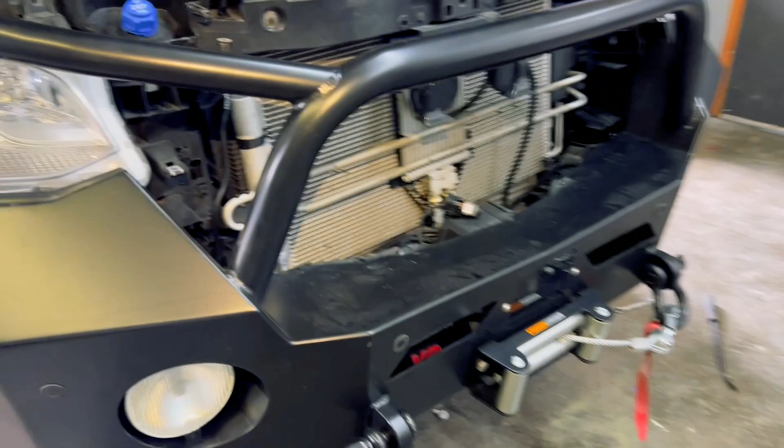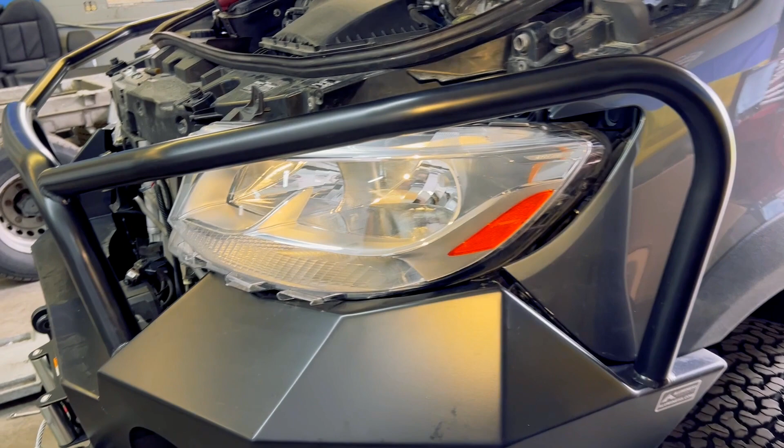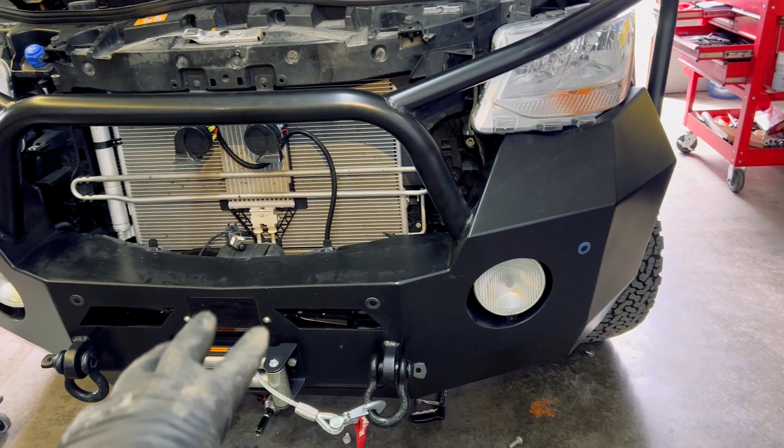After a few unsuccessful attempts to take the headlight out, unfortunately there's no other way. I'm already loosening the bolts that hold the bumper, but there's no way to take the headlight out unless we completely take off the bumper. I mean, I'm not gonna take it off completely. I'll use the forklift and loosen the bolts more, lifting it a little to have access to take the headlight out. Because of those rails, the headlight just gets stuck here and doesn't want to move at all.

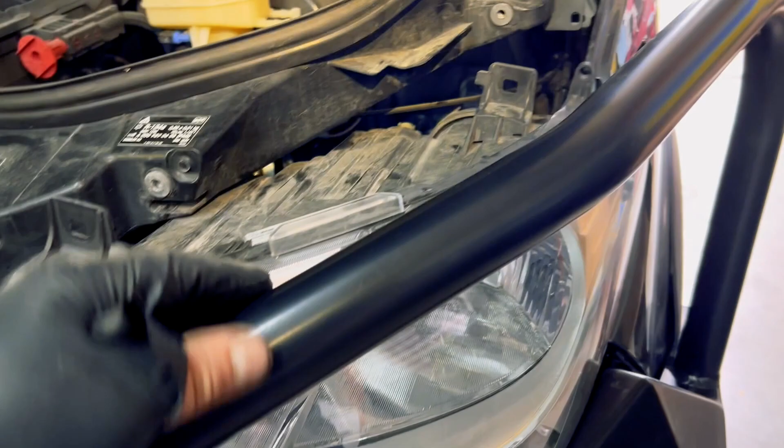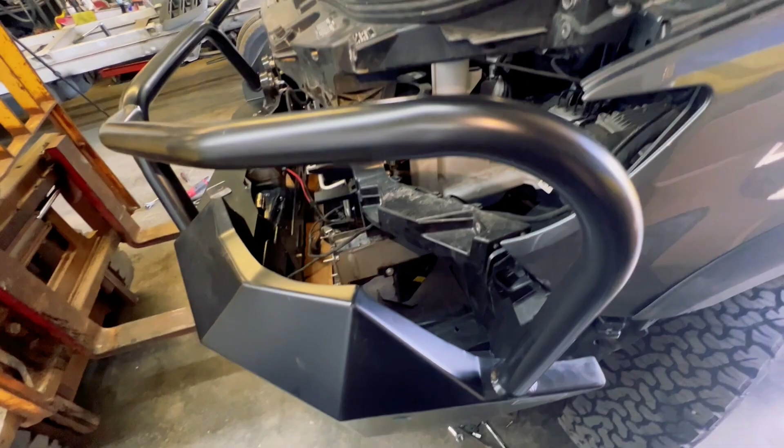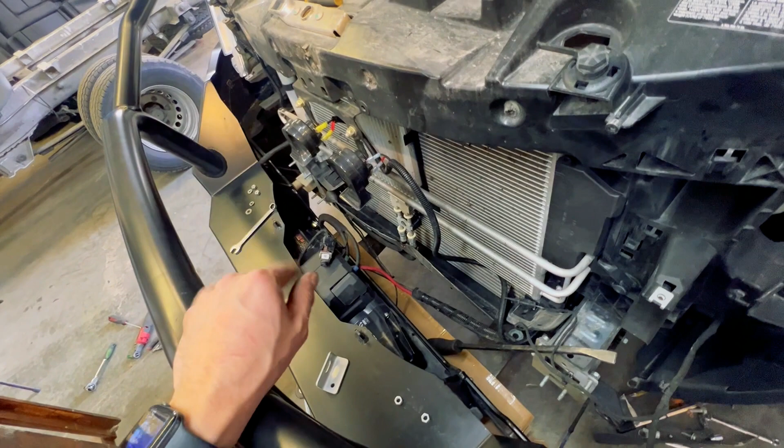So the left side is completely out now, but I had to almost remove the bumper. I just can't imagine if the owner of this vehicle, or any other owner, needed some maintenance on the radiator with a bumper like that. It's gonna take some time to get this bumper out, and I just don't want to disconnect any of the sensors, parking sensors, or cameras. So that's why I'm trying to be as accurate as possible. But it definitely takes some time to take it out.

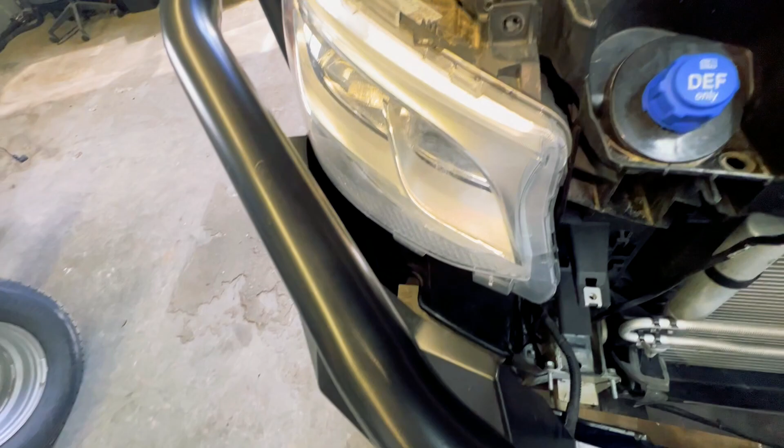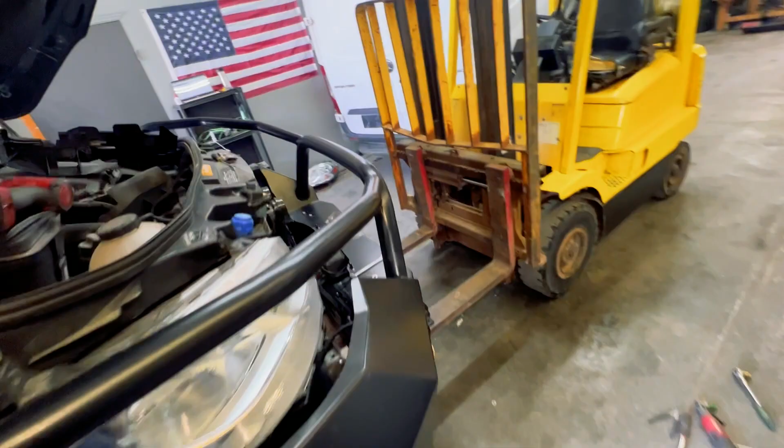On the left side it was easier. The right side will be more complicated because it goes behind the DEF tank. So we'll put the left side in first, and then move the bumper to the left so I can free the right side. That's how it's gonna be.

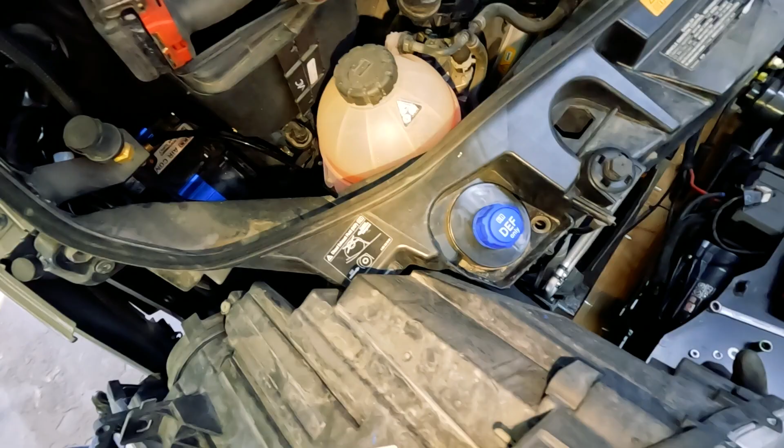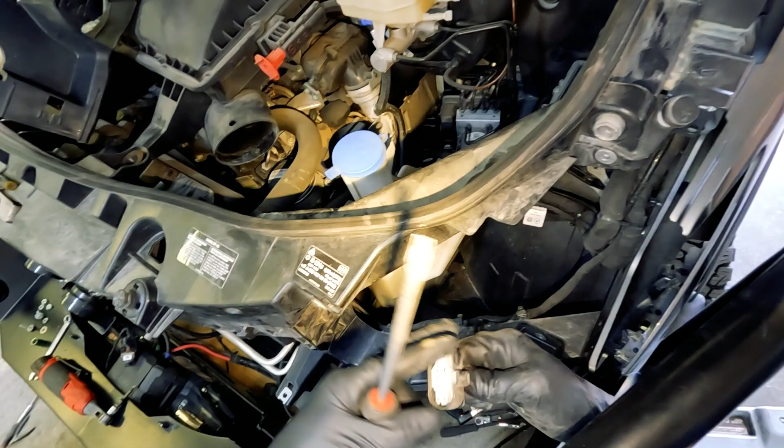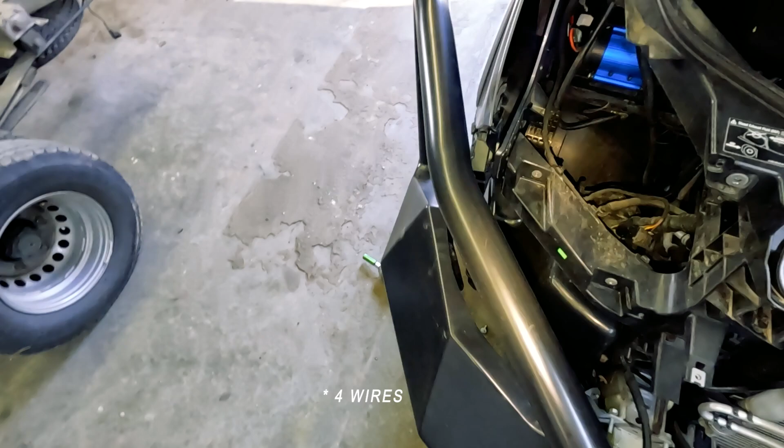Okay, so what we're gonna do now? Now we are going to change the order of the pins of the connectors on both sides, and add 4 wires for the leveling system.

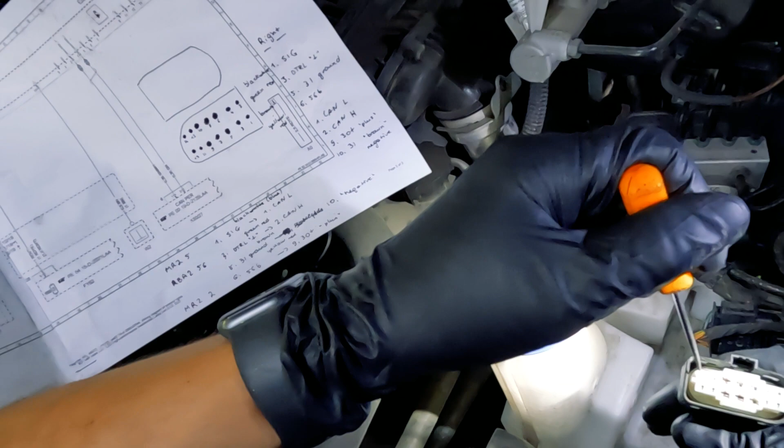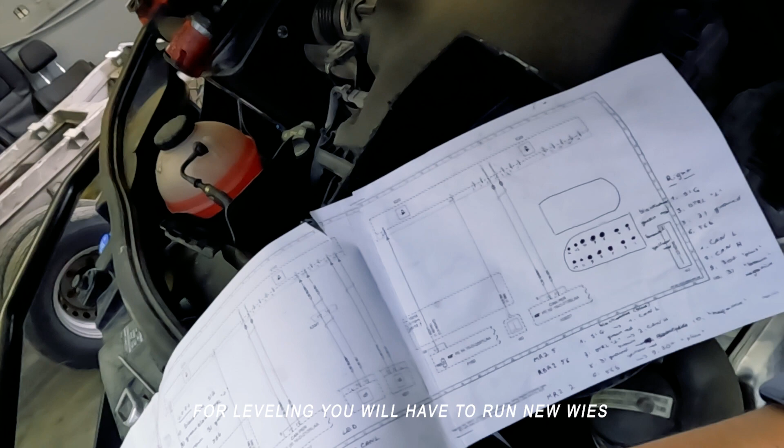So we'll start working on our wiring on the left side. By the way, the left side has the wiring for the leveling sensors, front left and rear left. The leveling sensors are located on the front left suspension and the rear left suspension. All the wires coming from the sensor go to the socket, and the sensors get their power from the headlight.

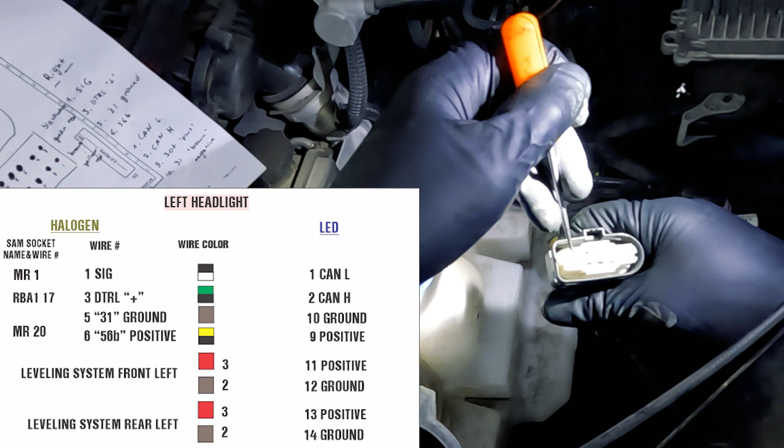On the socket you will see the numbers: 1, 2, 3, 4, 5, 6, 7, 8, 9, 10, 11, 12, 13, 14. That's the order, and each wire has a certain number. So I took the diagram of the numbers and the wirings for the halogen and LED lights.

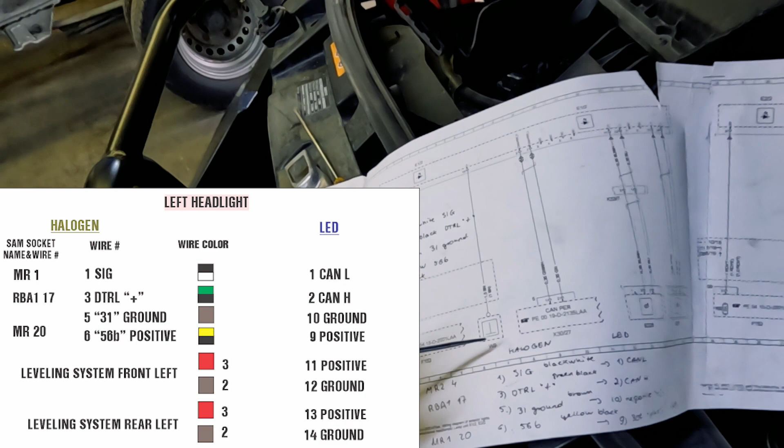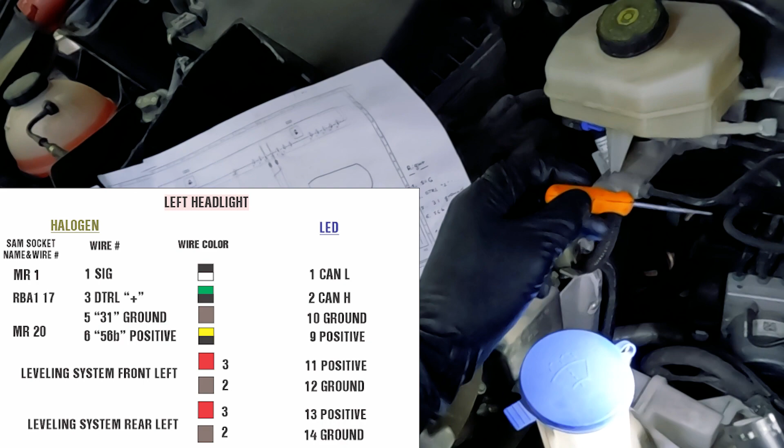On the LED lights we only need 4 wires besides the leveling sensors. The main wires are CAN low, CAN high, negative (so-called ground), and the plus power supply. They'll go to fuse number 68 and 69. But instead of just installing new wiring bought from Germany or anywhere else, we'll just change the order of these wires here at the module without any further modifications, except we'll add 4 wires for the leveling sensors.

On the halogen lights, we have wire number 1. It's a signal wire, black and white. Here it is, that's wire number 1. It's a signal wire — it will be our CAN low. The second wire, the CAN high wire, will be our wire number 3. It's the daytime running control positive. So we need to move this wire from position number 3 to position number 2.

Then we have our ground wire, this one. It has number 5, but for the LED lights it must have number 10. So we'll have to move it from number 5 to number 10. It's going to be our number 13, 12, 11, 10 here.

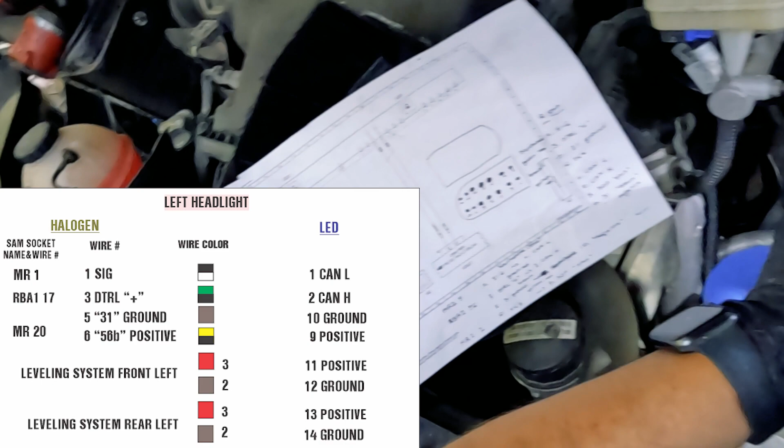And our power supply, that's the yellow and black. Here it has number 6, position number 6, but we'll have to move it to the number 9, just under number 10. So we'll have 10, 11, 12, 13, 14. Our yellow and black will be here, and our ground will be here.

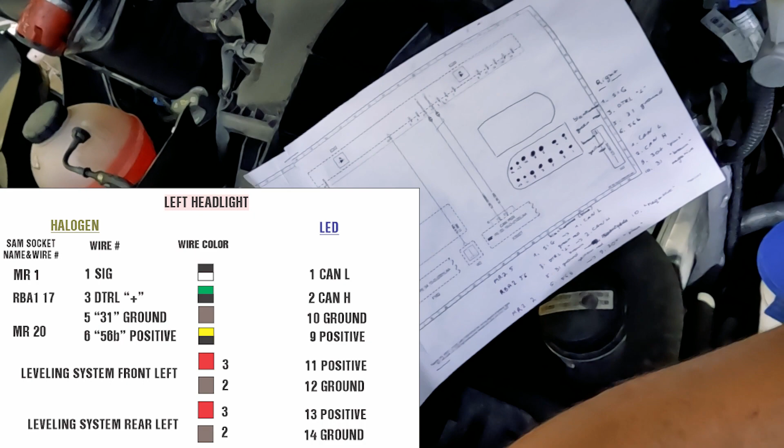This type of socket is pretty simple. There are 2 different types of sockets depending on the build of the Sprinter van, but here are small locks. You carefully pry them and unlock it, so this way you'll be able to pull that. I'm going to show you right now, carefully pulling them out from their sitting places.

We have to move this wire. It has a small plug over here, so we have to be really careful. I'm going to take something more narrow to pry that plug out.

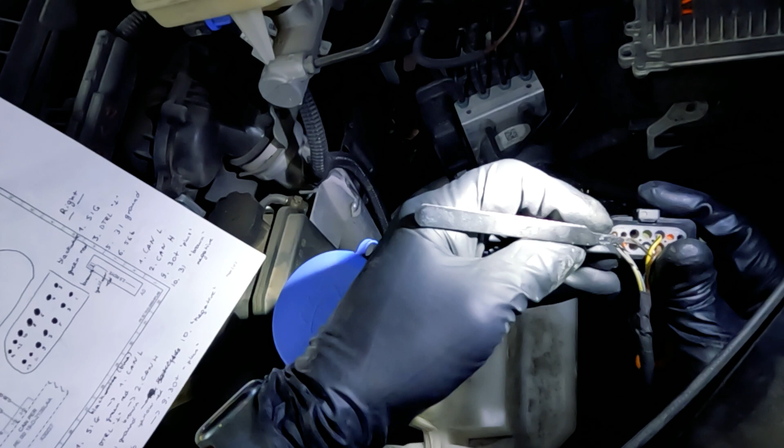So now I'm gonna move the green one, that's the daytime running control, to position number 2. That's gonna be our CAN high.

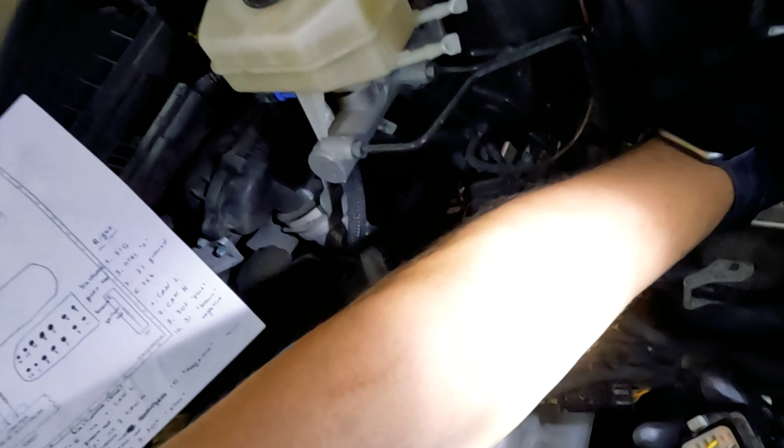I will have to open this lock here, and need to carefully open the locks underneath, the plug here too, for our... yeah, just like that.

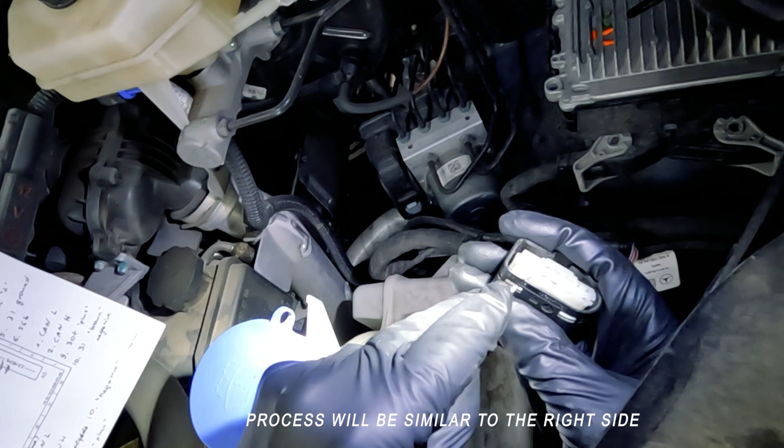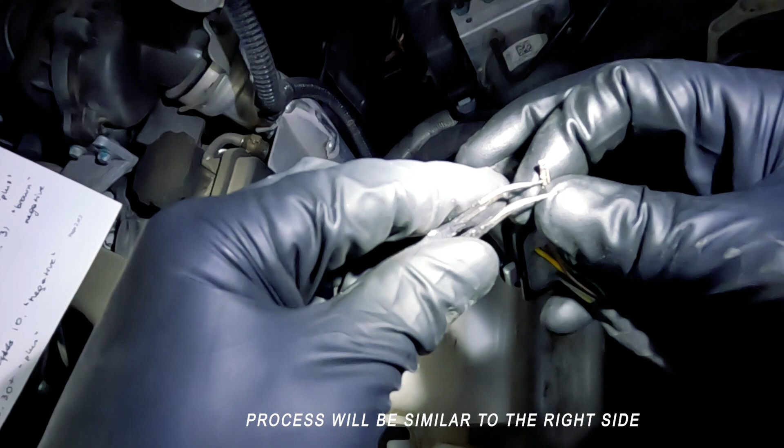So after you remove the wire, you'll see a small lock over here. You have to put it back in order, locking the wire in place on a new sitting place.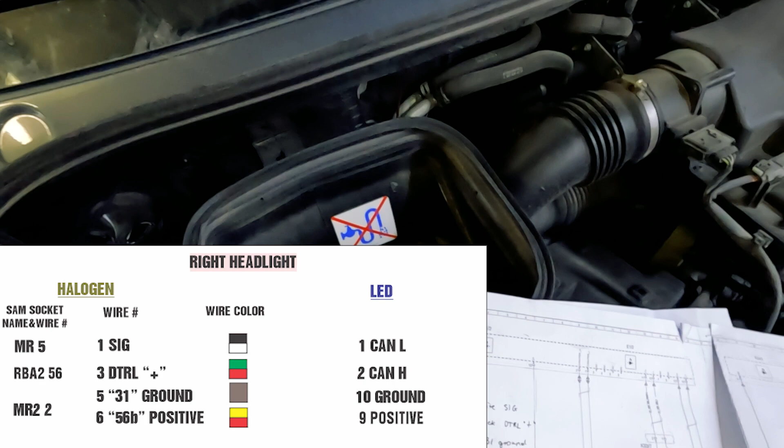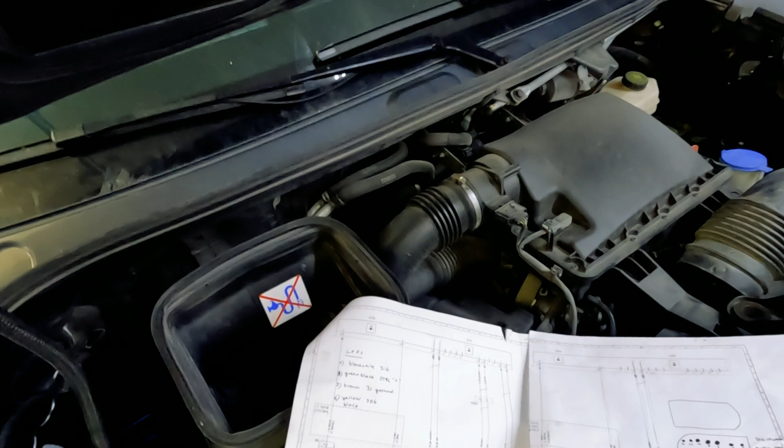So same thing we're doing on the other side, just changing the order of the connector. In this case, it's almost the same as the left side, but some colors are different. So I already put the lights and the bumper in. That's how it looks like. The difference is just spectacular.

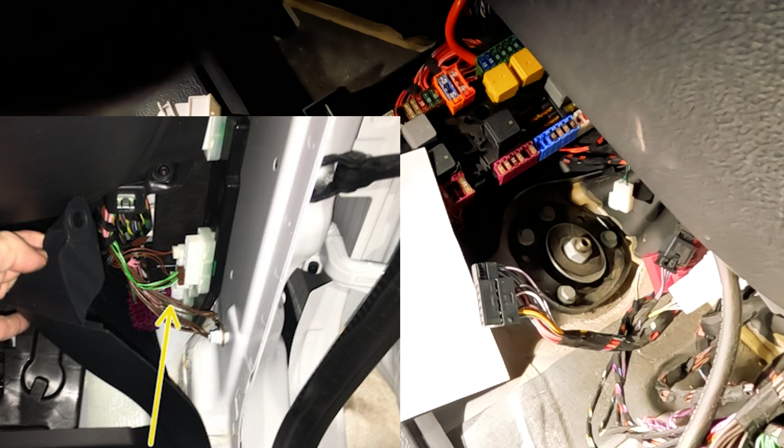So we're gonna start everything with changing the order of the wires, with CAN high and CAN low. Here's the place where you connect your CAN high and CAN low. I already connected to sockets that I had from the old Sprinter, but if you don't have them, I think you could just connect to either one of those.

Doesn't really matter. The solid green color is CAN low. The green with the stripe is CAN high. In my case, it's gonna be violet — solid violet will be CAN low, and violet with the stripe will be CAN high.

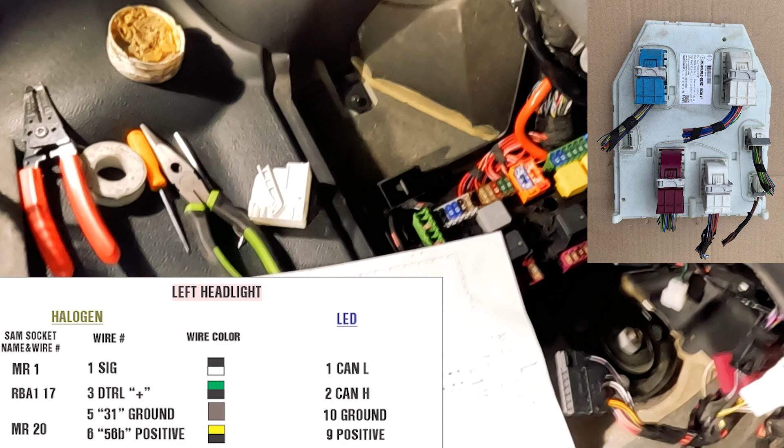All right, let's connect the left headlight first, the CAN high and low. Here's the order of those wires. So if you remember, we have our signal wire number 1, that's black and white, that's CAN low. It is located in the MR1 socket, wire number 1. The CAN high, that's the green black wire, connector number 17, wire number 17, connector RBA1.

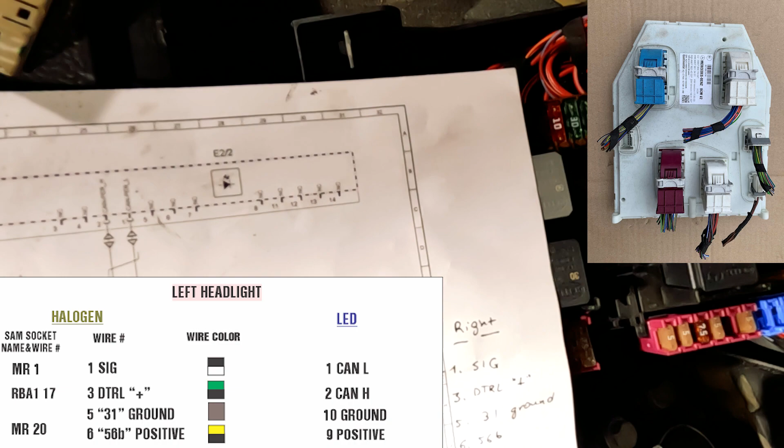So let's disconnect the MR1 connector first. And here you see the numbers, and we need number 1. Here's the number 1. And taking out that piece carefully.

Okay, you see the wire, black and white. That's our signal wire and our CAN low, which will be connected to the solid violet. Carefully pressing.

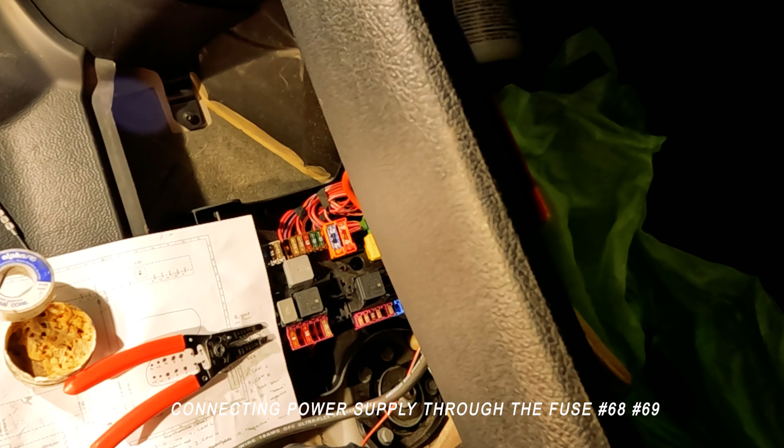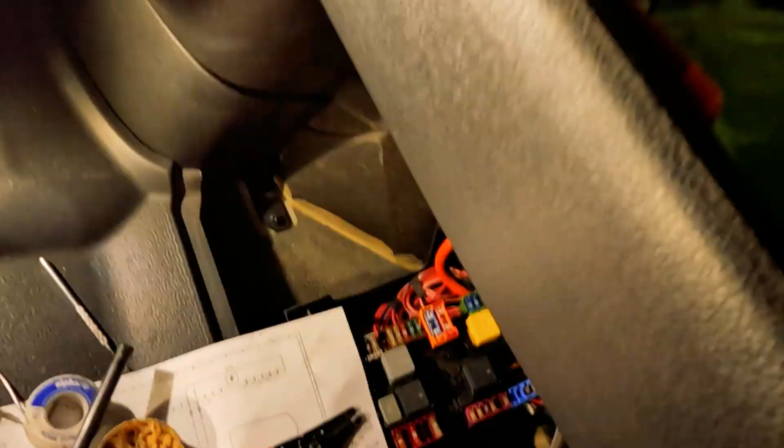That's it. And in the end, we'll check the light, and we see that everything works. I'm gonna do the same for the right side. Everything works as it should work.

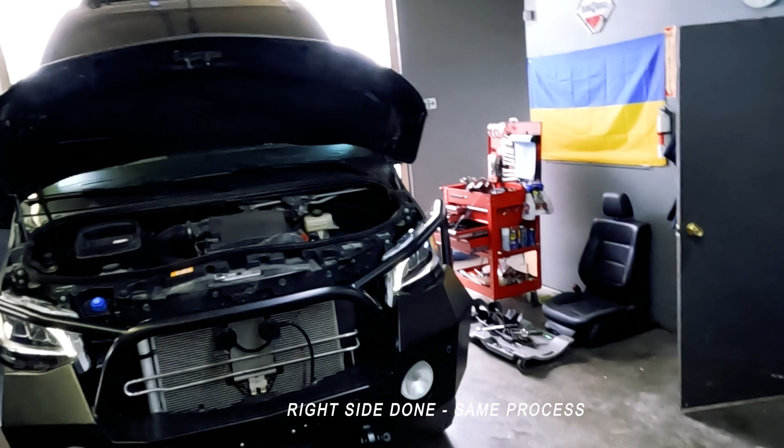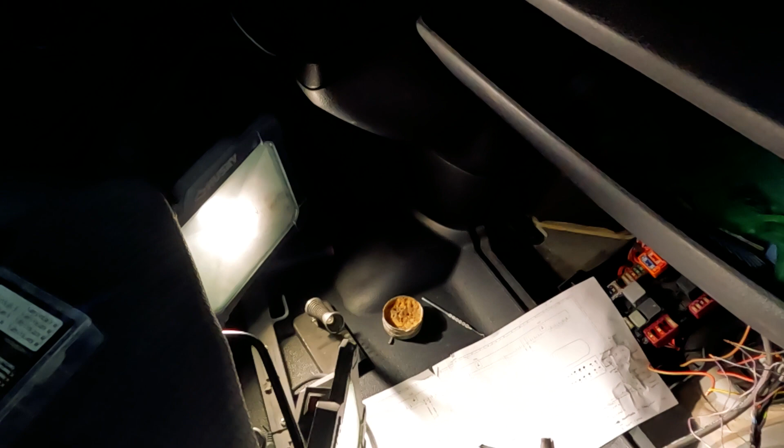So now we have to solder everything and perform the coating. All right, and get the things here aligned perfectly, so it's gonna look clean and nice. That's pretty much the easy way to do the wiring job and save 300 bucks or so on a German wiring harness or whatever. But for some people it might be easier to just buy the already pre-made set. I'm not saying anything against it, but for me it's just really easier to redo the wiring. All right, we'll show a little bit of the coding process and the leveling system left.

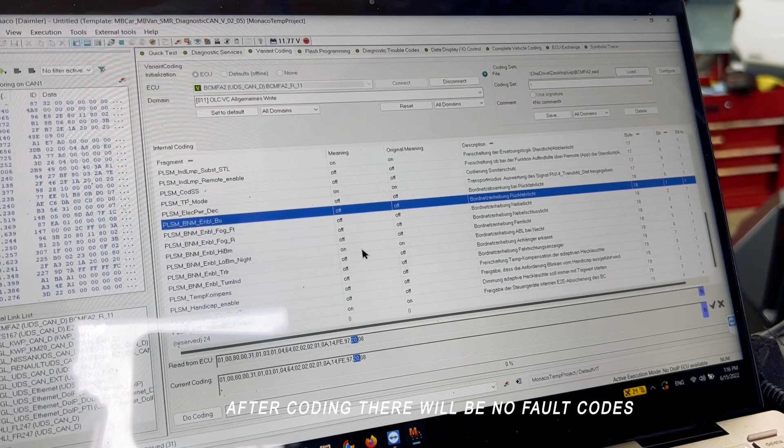So after we did some coding update, no more faults at all. Everything works excellent, and absolutely no problem, just the airbag, but besides the airbag, all the lights are shaking up again. Excellent.

We'll show it once again: shutting down the vehicle and starting it again. No fault codes.